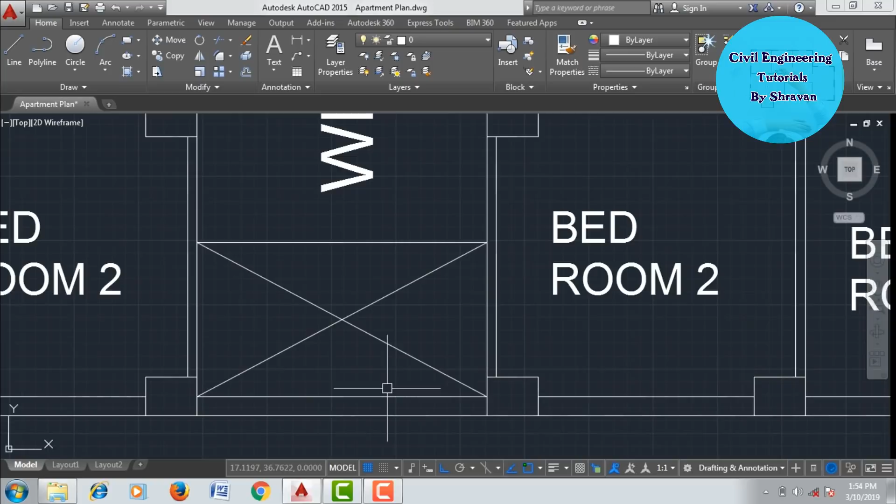This is the first flat. It consists of kitchen, hall, bedroom and bedroom. The right side also consists of hall, bedroom 1, bedroom 2 as well as kitchen. This is my wide veranda. It consists of a lift portion for the apartment building and staircases at the east facing.

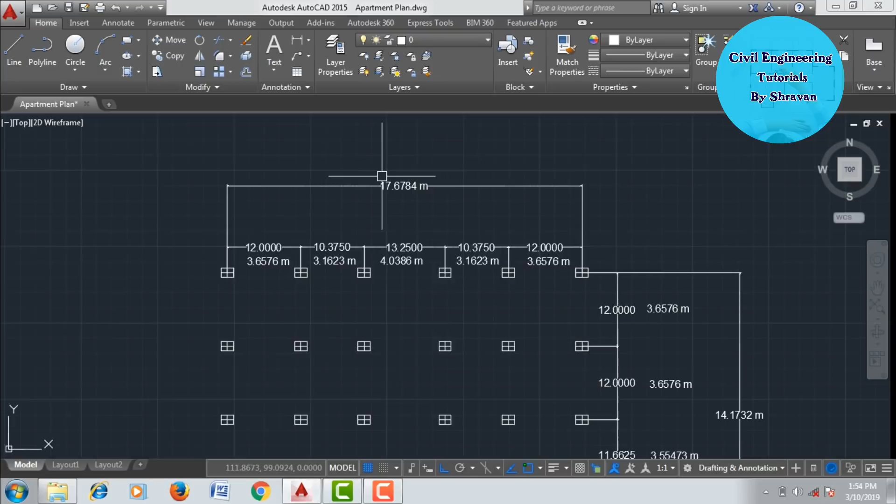This is the center to center distance between the columns. I converted these feet into meters. 12 feet from column 1 to column 2 is nothing but 3.6576 meter. So I converted this. It consists of 17.6784 meter in the length direction and 14.1732 meter in the width direction. So this is my AutoCAD plan for the apartment building.

I will design this apartment building in STAAD Pro V8i software. Go to your STAAD Pro V8i software. Click on new project, select space. Here we need to give the file name. I am assuming the file name is apartment building AP. Save your file location, for example to the desktop. I am saving my file location to apartment building design.

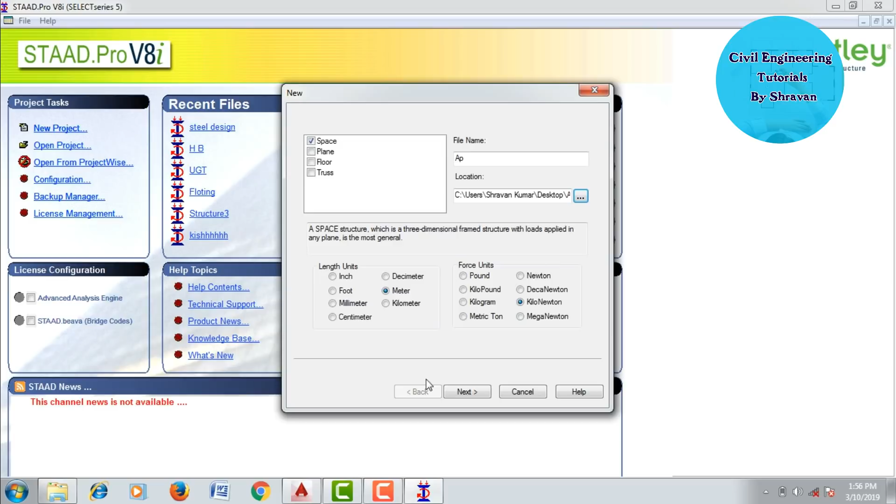Click on OK. Here we need to select the length units as meter and force units as kilonewton. Click on next button. After that, click on add beam command. Click on finish button. After that, the software will open like this. Keep your structure in front of you. Go to geometry directly. Click on run structure wizard.

Here we need to select the model type from truss models to frame models. We need to select frame models, and in this we need to select bay frames. Here we need to enter the length direction distance as per the plan. We need to enter the length of the apartment, 17.6784 meter. And we need to enter the height of the apartment.

Initially I will consider only the bottom story of the apartment. After modeling the bottom story, I will copy it to the remaining 5 stories. For this case, I am considering a 3 meter height for the first story. For the width, we need to consider the width of the building, 14.1732. After that we need to enter the number of bays in the length direction.

We need to assume the number of bays as per the plan. There are 5 bays in the x direction, nothing but the length direction. So we enter 5 bays. The number of bays in the height direction is 1. The number of bays in the width direction is 4. Click on these 3 dots.

Here we need to enter the length values for each individual bay. Length is nothing but the center to center distance between your columns in the length direction. 3.1623 is the second bay length. The third bay length will be 4.0386. The fourth bay length will be 3.1623. The last bay length will be

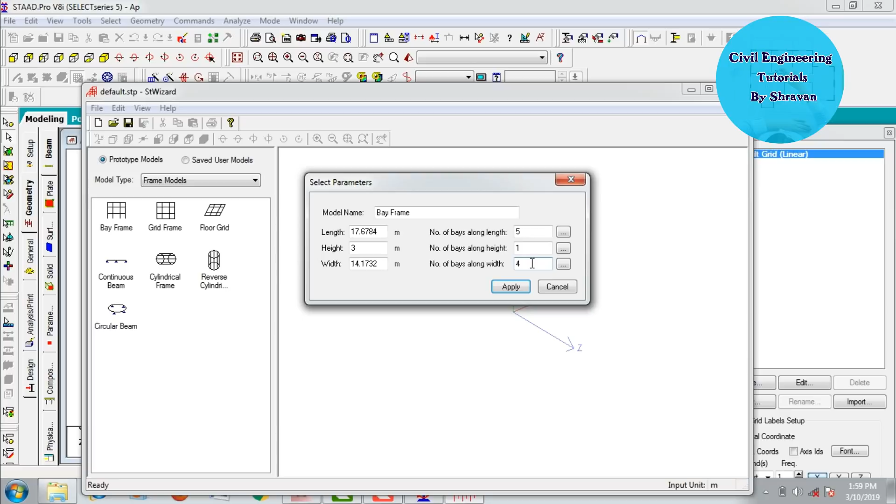3.6576. Click on OK. After that we need to give the number of bays along the height direction with the 3 meter distance. Click on OK. After that we need to give the values for the width direction. Click on the 3 dots here. Here we need to enter the length values. For the first bay length we need to enter the value as 3.30327.

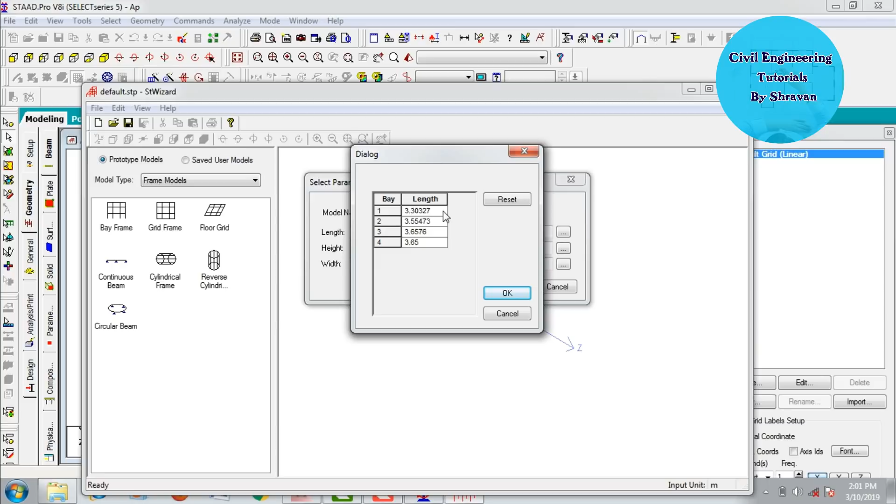For the second bay length we need to enter 3.55473. For the third bay length we need to consider it as 3.6576. For the fourth bay length we need to consider 3.6576. Click on OK, then click on apply. So this is my general center to center distance for the respective bottom story of the apartment building.

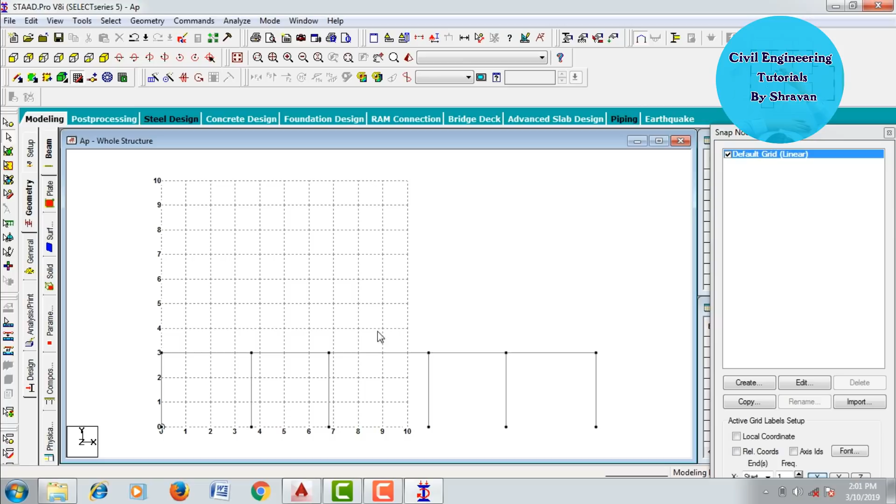Now we need to merge this model from Structure Wizard software to STAAD.Pro V8i software. For that, just cancel this, click on the S button, and click on OK. It will merge this model from Structure Wizard to STAAD.Pro V8i. Keep your structure in 3D view and hide your snap node grid.

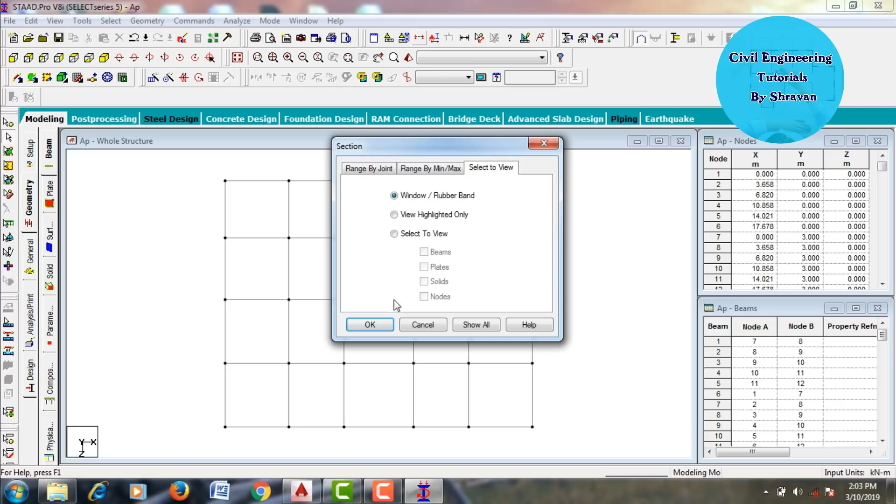After that we need to add the staircases as well as the lift portion for the apartment building. For that, keep the structure in top view. Here we need to select the staircases, and here we need to create the lift portion. Go to cut section command, click on select to view, click on OK. Just cut your staircase portion. After that keep your structure in 3D view again.

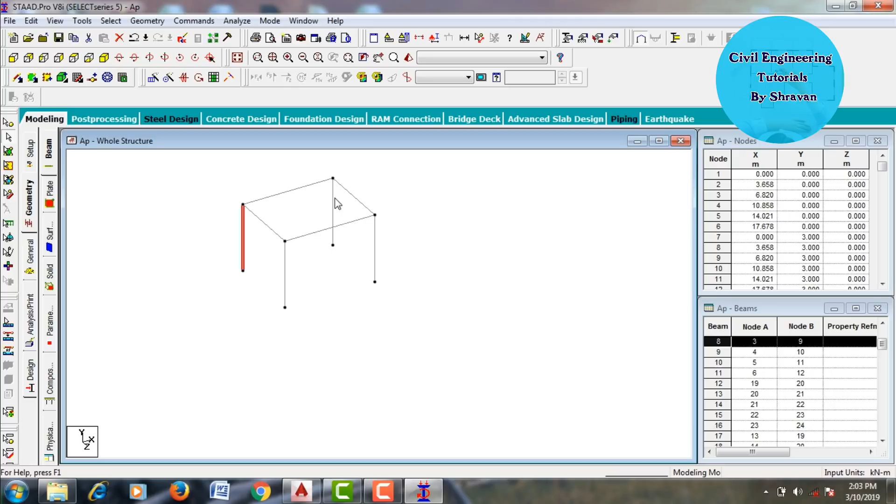For this apartment building, the stairs will go up from here to some distance, then there will be a landing, and from the landing it continues to the remaining portion. So initially we need to create the landing. For that, select your two columns, go to insert node, and insert a node at the midpoint.

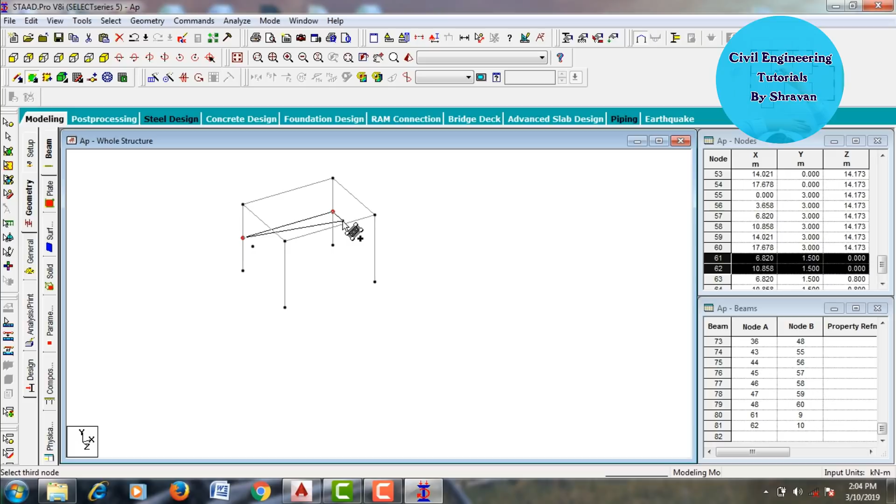After that, select the node points and copy them. Paste the nodes at a distance of 0.8 meter in the Z direction. Click on OK. Then we need to join these node points using a plate. Go to add 4 node plate, select your first node point, second node point, third node point, and fourth node point.

After that we need to add the beam section for the landing. Go to add beam command and add your beam portions for the landing. Then we need to create the center point for this beam. Right click, click on insert, create a node point at the midpoint, and click on OK.

After that we need to measure the center distance from this node point to this node point. Go to measure, select the first node point and the second node point. It is 2.019 meter. Then measure the distance of the second portion. It is also 2.0.

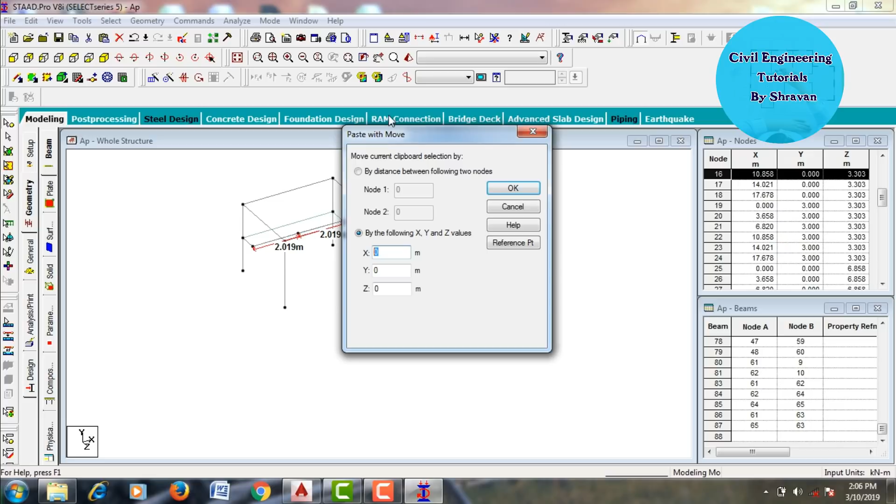Here we need to add a node point at a distance of 2.019 meter. Select the node point, copy, and paste it at an X direction distance of minus 2.019. It will copy your node point to here. Then we need to create a node point for this top portion: right click, go to insert, add midpoint, click on OK.

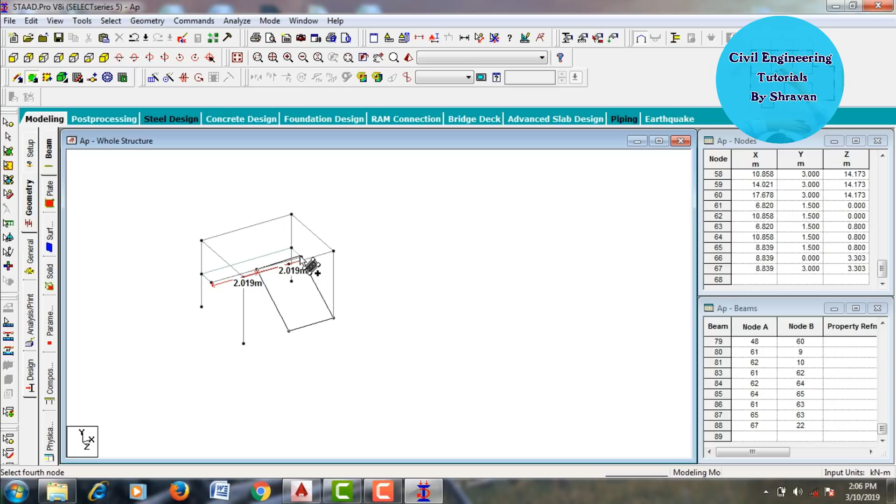After that we need to draw a slab section using a 4 node plate. Select your 4 node plate, then select the first, second, third, and fourth node points. It will draw the staircase slab for the respective sections. Then we add the staircases for the remaining portion: select the first, second, third, and fourth node points. After that click on whole structure command.

I will show you this model in 3D rendering view now. Deselect the remove dimensions command and select 3D rendering. So this is my apartment building with the staircases.

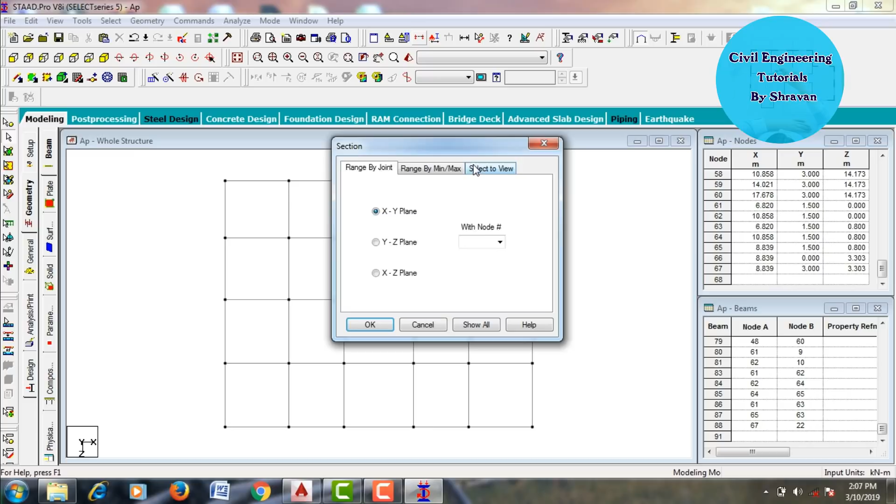After that we need to create the lift portion for the structure. Keep your structure in top view, click on cut section command, click on select to view, click on OK. We need to cut the bottom section for the respective slab.

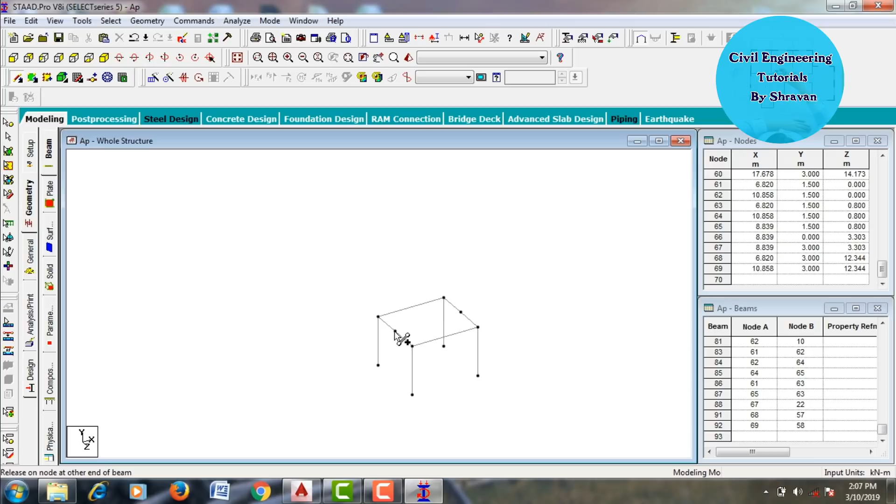So after that we need to add the center point for the respective beams. So go to select your beams, again go to add your node, insert node which is at midpoint, click on OK. So after that we need to connect the node points in this direction. So go to your add beam command. So connect your respective nodes in this direction.

After that we need to create the node points for the respective direction in downward direction. So for that go to select your node points. Just I am selecting my node points. Go to copy. So paste nodes which is at a distance of -3 in downward direction. Click on OK. Add. So go to keep your structure in top view now.

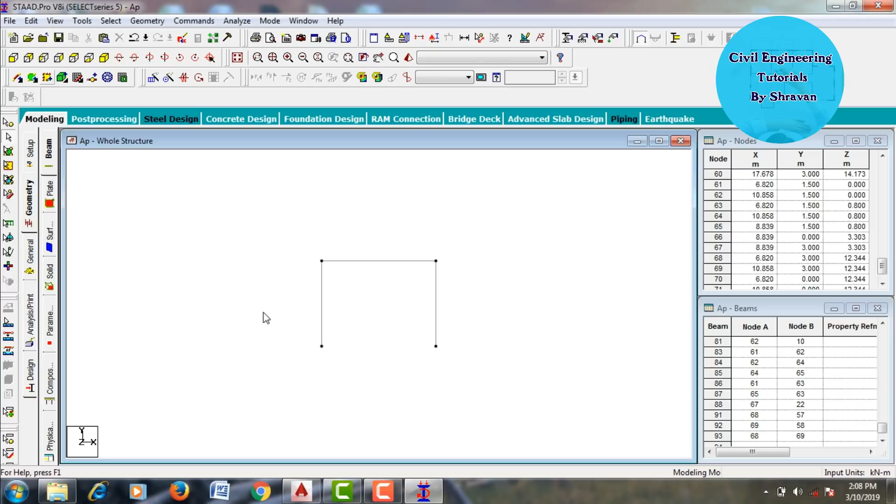So here we need to add the column section for the respective node points. Go to select your node point, select this node point, again select this node point, select this node point, select this node point. So go to geometry, connect beams along Y direction. Click on OK. So it will connect your beams for the respective slab. After that we need to click on whole structure command.

After that we need to add a slab portion for the remaining case. So for that go to select your 4 node plate, click on first node point, second node point, third node point, fourth node point. Again select your first node point for the right hand side also, second node point, third node point, fourth node point for the respective slab.

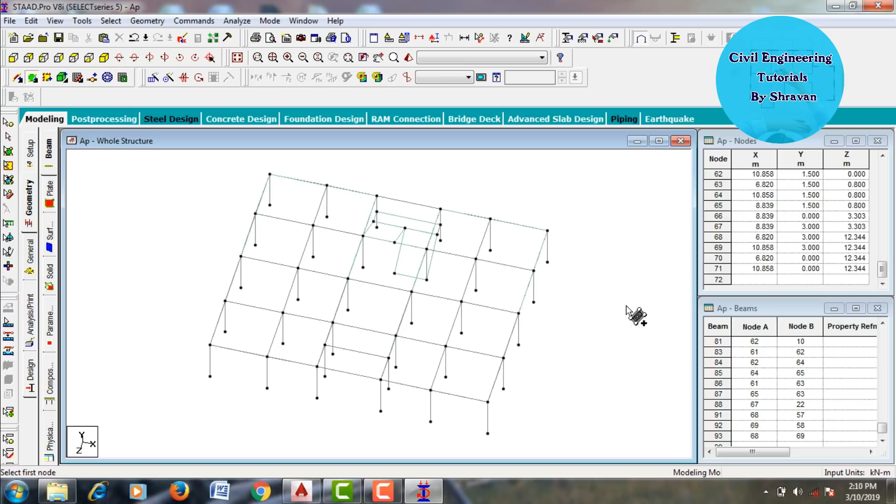So after that we need to add a slab portion for the respective remaining veranda. So for that go to select your top view, select first node point, second node point, third node point, fourth node point for the respective slab. So after that I will show you this model again in 3D rendering view. Go to select 3D rendering view for the respective structure.

So this is my general apartment building. It will be consisting of your staircases as well as lift portions. Here I assumed open space for the respective lift case. So after addition of remaining stories, I will add the shear walls for the respective lift portion. For the lift portions, shear walls are generally considered for the respective section. So after addition of remaining stories, I will add the shear wall for the lift portion in this apartment building.

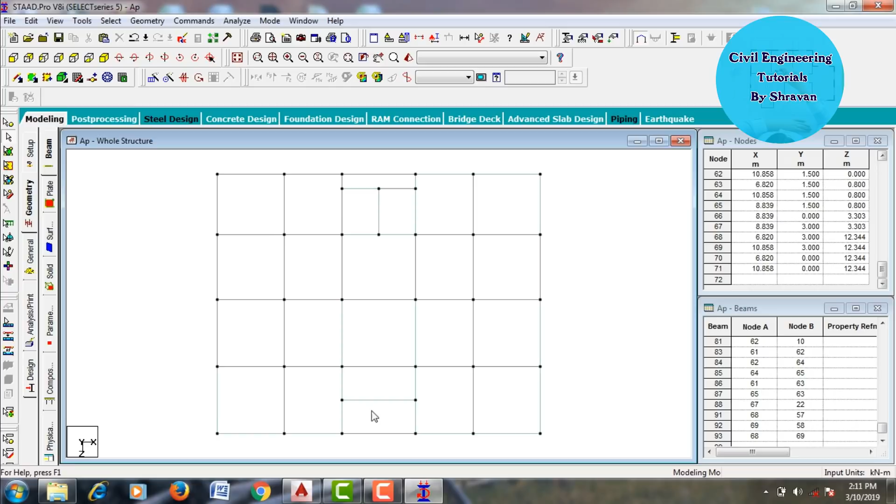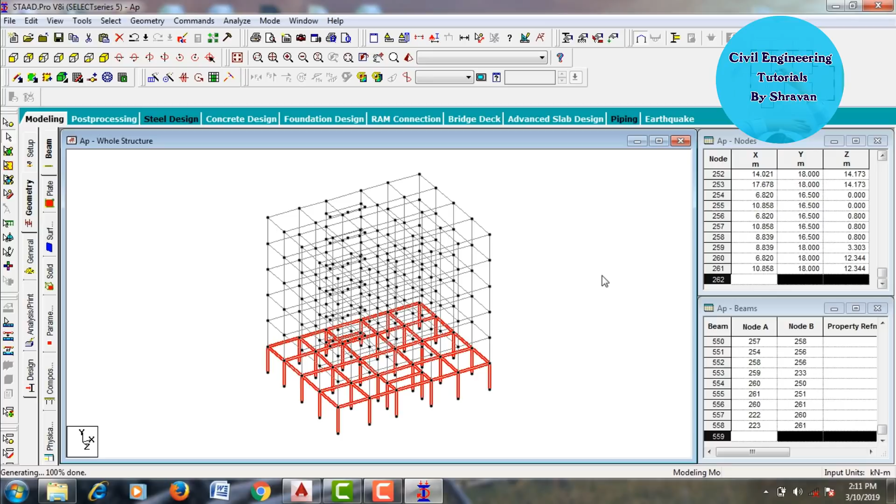So after that, go to your 3D rendering view. Here we need to copy the respective structure to remaining stories. So for that, select all your components for the respective building. Go to translational repeat. Here we need to select Y direction and enter the number of steps. This is my first slab. We need to enter the remaining steps. Each step will be consisting of 3 meter height. Click on OK. So it will copy your respective structure to remaining 5 stories.

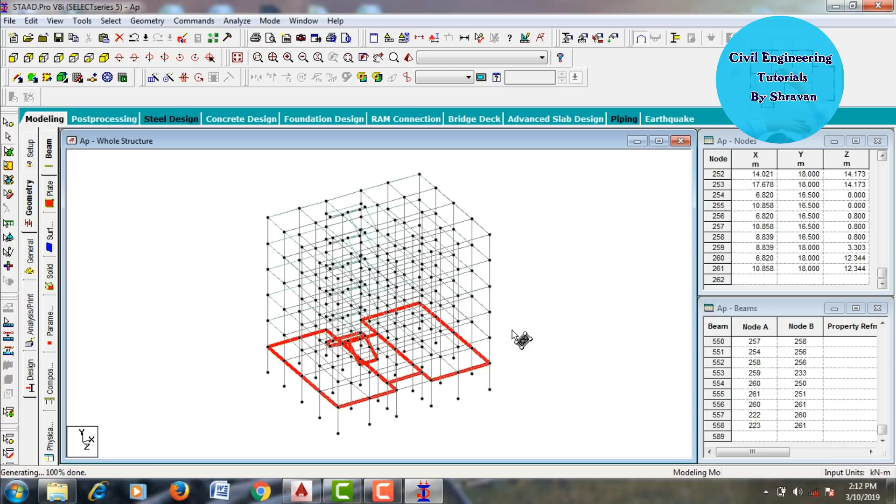So after that we need to copy the respective slab section to the remaining stories. So for that go to select your slab cursor, drag to your whole structure, again go to your translational repeat, again in Y direction. Number of steps are 5. Each step will be consisting of 3 meter height in Y direction. Click on OK. So it will copy your steps, staircases as well as your respective lift portion to remaining section.

So I will show you this model in 3D rendering view. This is my 3D rendering view for the apartment building. It will be consisting of staircases as well as lift portion of G plus 5 story building. So after that I need to add the shear wall for the lift portion. So for that keep your structure in top view. Go to cut section command, click on selective view, click on OK. Cut the lift portion for the respective structure.

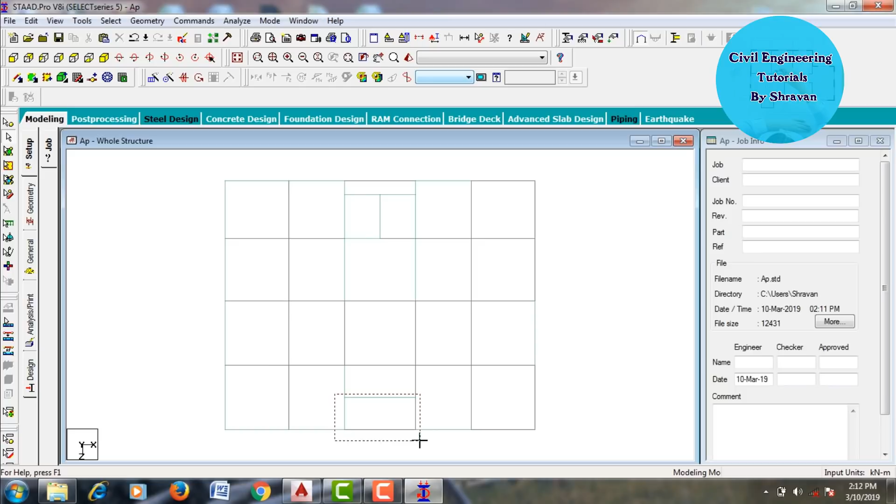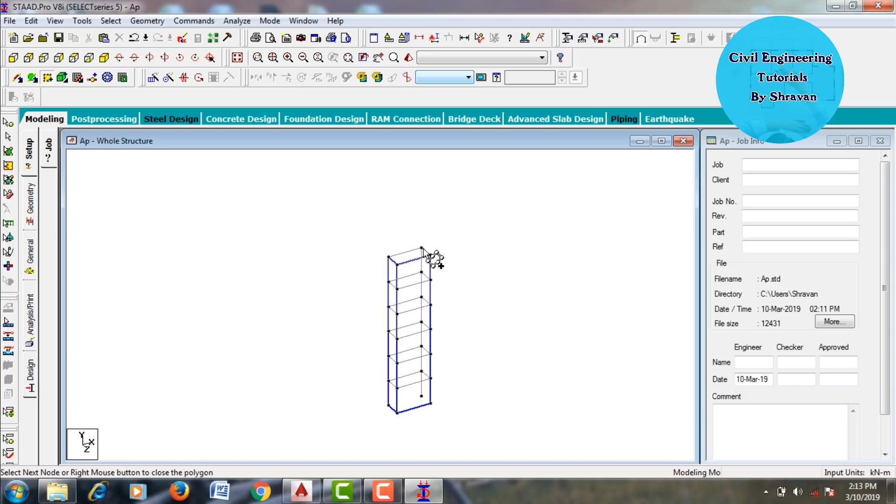So go to select in 3D view. Here we need to add the shear wall. For addition of shear wall we need to select the surface cursor, select your first node point, second node point, third node point, fourth node point, and first node point again. Again select your first node point for the left hand side section, second, third, fourth and first node point. Again first, second, third, fourth, and first node point for the respective case.

After that we need to see the whole structure command for the respective building. Click on whole structure command. So I will show you this model again in 3D rendering view. Click on 3D rendering view for the respective structure.

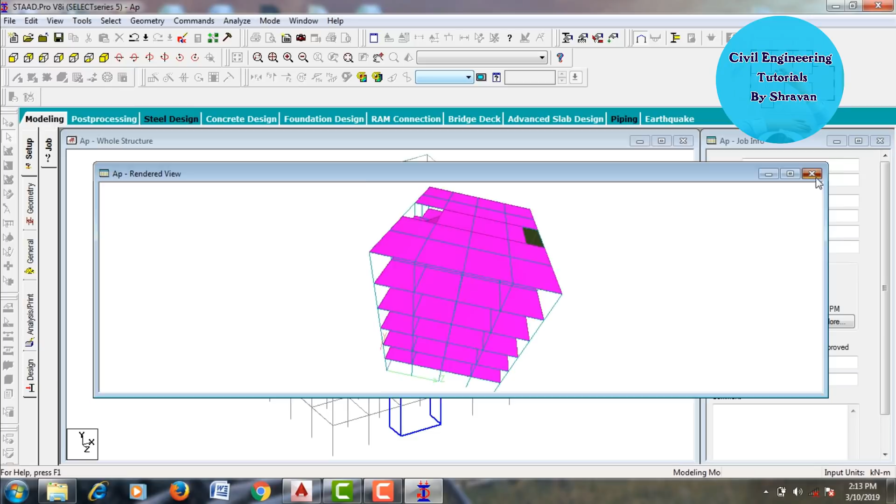This is my 3D rendering view for the respective apartment building. After that we need to proceed for the properties section. Go to general, click on properties. Here we need to define the beam sections as well as column section for the respective case. Here we need to assume the rectangular section.

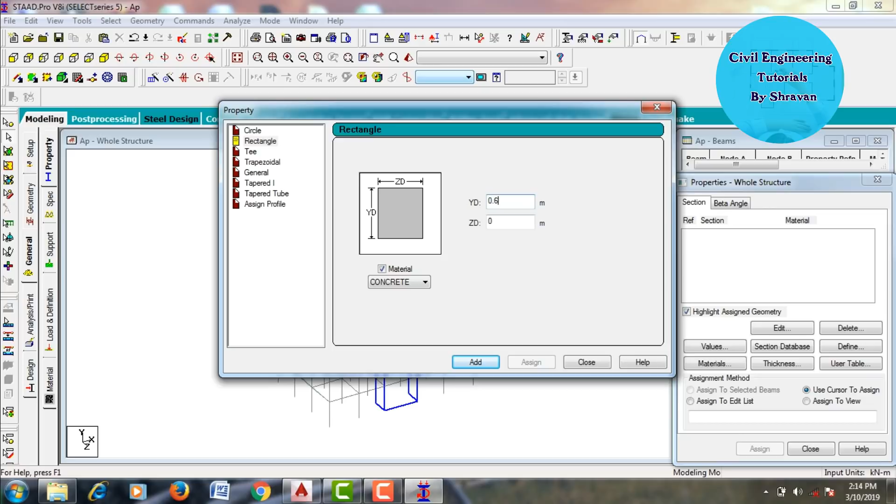Here we need to enter the value of YD as ZD distance. YD is nothing but your 2 feet. I converted that 2 feet into meters, so it is 0.6096. After that ZD distance is 0.4572. Click on add. After that we need to give the dimensions for the respective beam. For the respective beam, I consider 0.4572, nothing but 1.5 feet. Click on add, click on close.

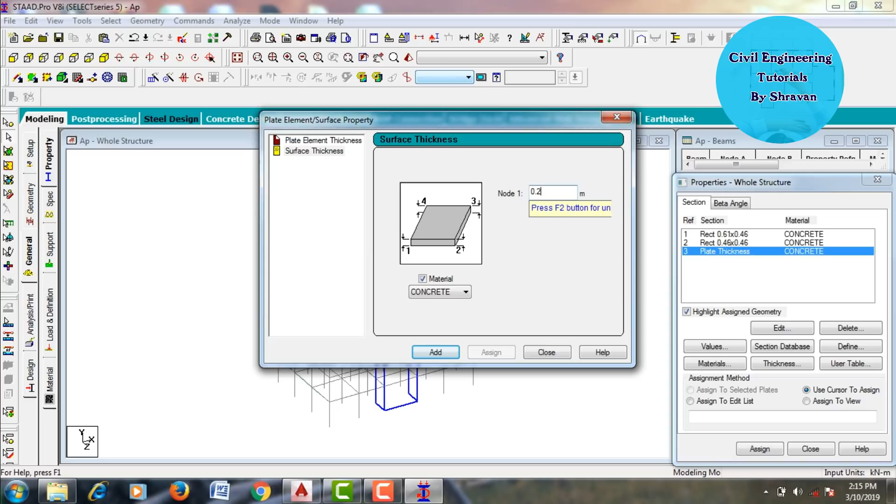After that we need to define the thickness for the respective apartment building slab section. Click on thickness, next we need to assume the thickness for the respective slab. I am assuming the slab thickness will be consisting of 0.15, nothing but 150 mm. Click on add, go to add your surface thickness, nothing but shear wall thickness. I am assuming shear wall will be consisting of 0.23 meter thickness. Click on add, close. After that we need to assign the respective sections for the apartment building.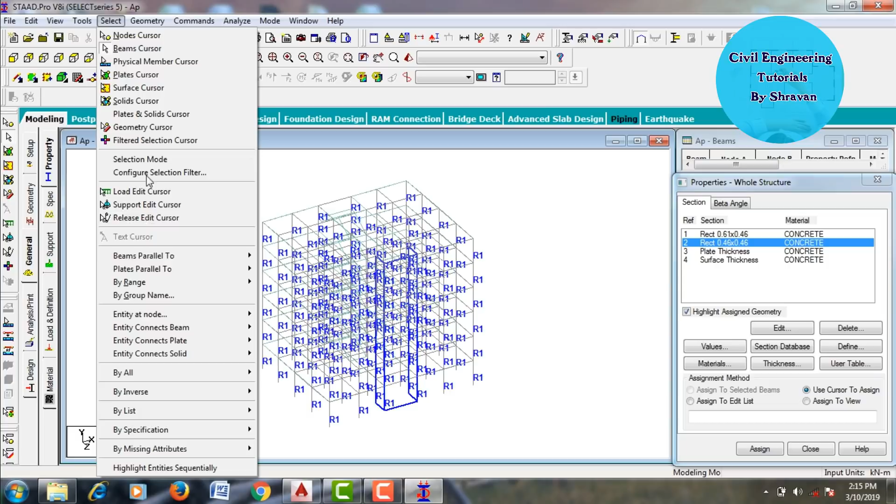Go to select your column section, go to select beams parallel to Y direction, click on assign to selected beams, assign yes. After that go to select your beam sections, go to select beams parallel to X direction, again go to select beams parallel to Z direction, click on assign to selected beams, assign yes.

After that we need to assign the plate thickness, nothing but slab thickness, for the respective portion, click on assign to view, assign yes. After that we need to assign the surface thickness, nothing but shear wall thickness, for the respective building, click on assign to view, assign yes.

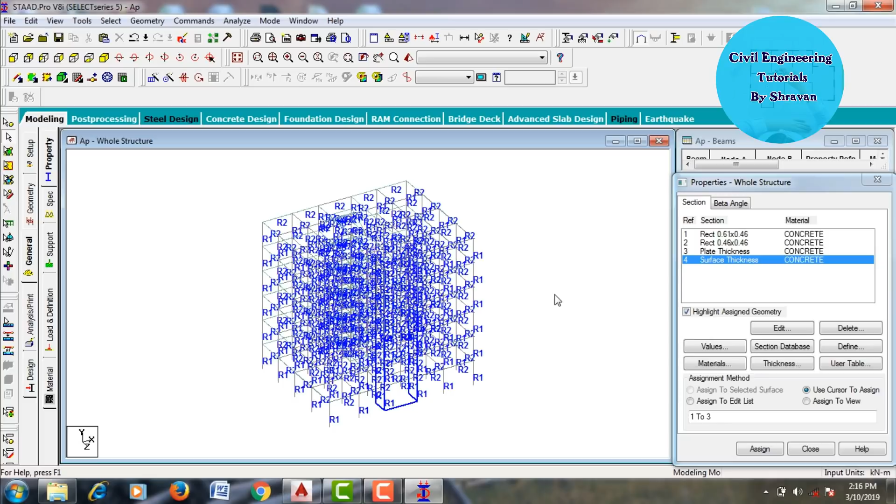I will show you this model again in 3D rendering view for the respective apartment building. Go to click on 3D rendering view for the respective building. This is my 3D rendering view for the respective apartment building.

It will be consisting of 2 feet by 1.5 feet is my column size, and 1.5 feet by 1.5 feet is nothing but your beam size, and 150 is my slab thickness, and 230 is my shear wall thickness.

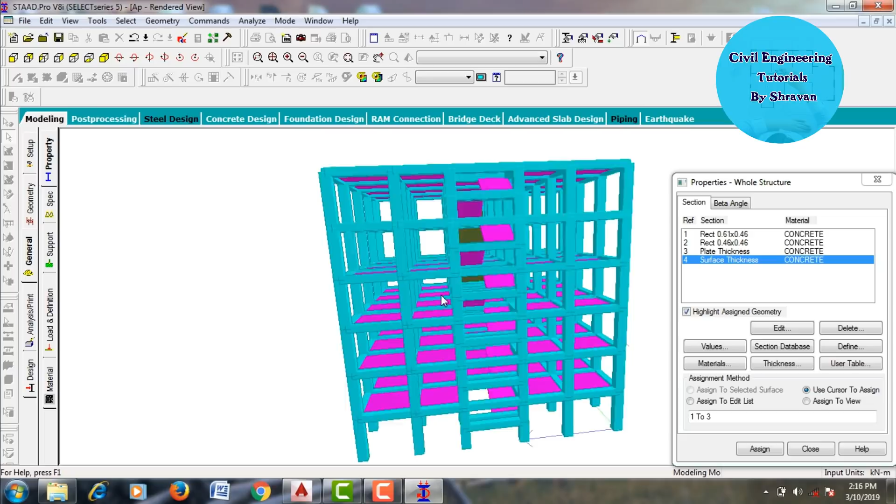After that we need to add the supports for the respective apartment building. Click on supports, keep your structure in front of you, click on create button. Here we need to create the fixed support. Click on add, select your support to drag your bottom section for the respective portion. Click on assign to selected nodes, assign yes.

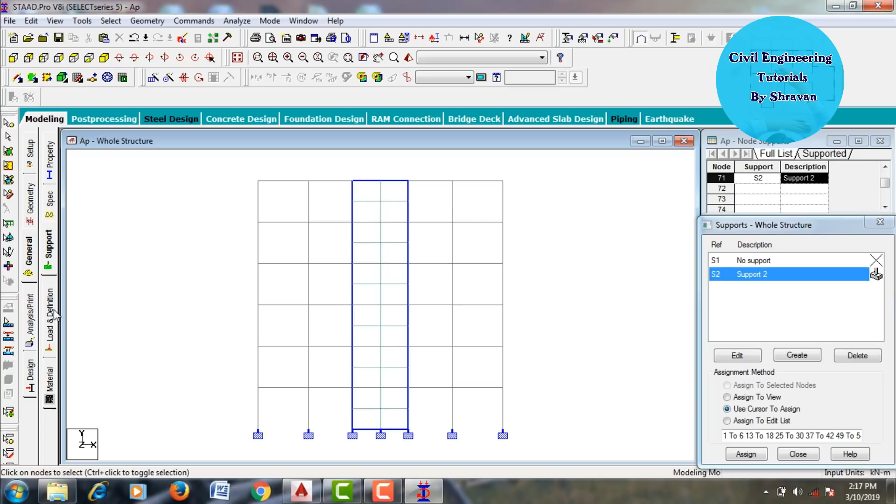After that go to loads and definitions. We need to add the load cases for the respective apartment building. For this building, I am considering dead load, live load as well as floor load. For assigning your load cases, go to load case details, click on add, go to add your dead load. Here you need to enter the value of load case as dead load DL, just I'm considering as DL.

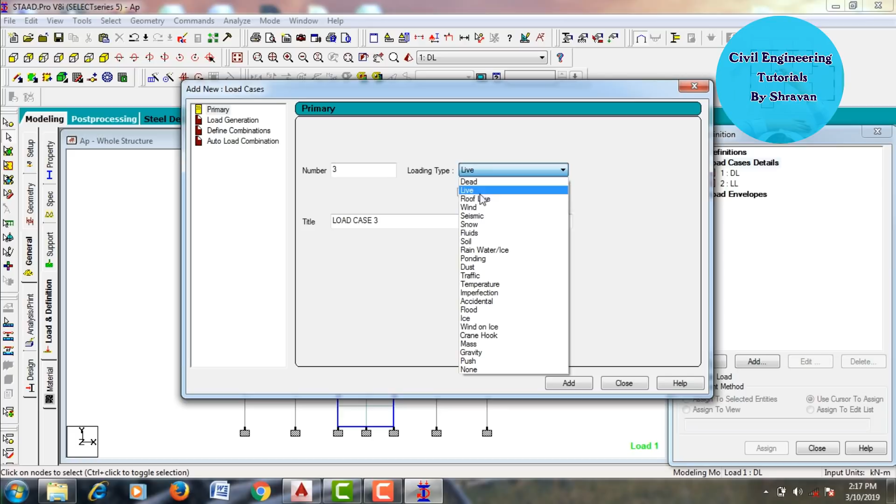Click on add button. After that select your live load, just we need to consider load case as LL. After that we need to consider load type as roof live. Just I'm considering floor load FL. Click on add, so after that close it.

Go to select your dead load, click on add button. Here we need to add the self weight for the respective structure in Y direction with -1 as the self weight factor. Click on add, close.

After that go to select your live load, click on add button. Here we need to enter the value of floor load, so we need to enter the value of pressure. I'm assuming the floor load will be consisting of 4.5 in minus direction in global Y direction. My first slab is at 3 meter as well as my last slab is at 18 meter.

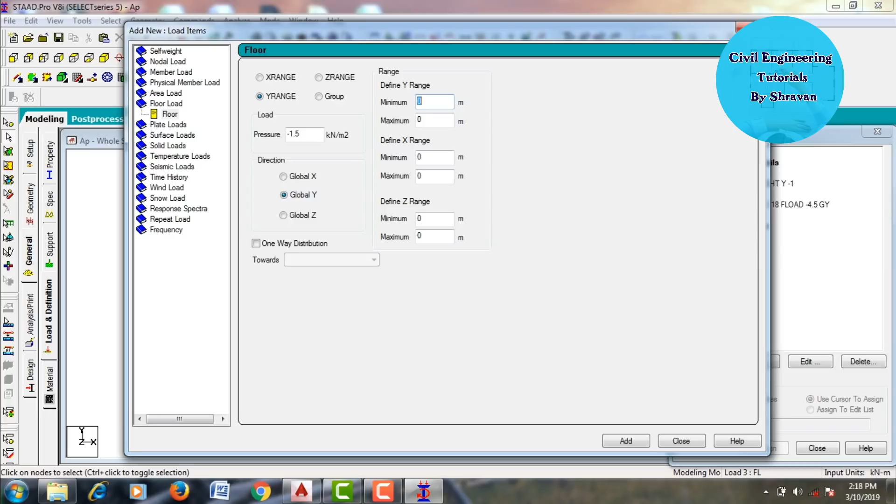Click on add, close. Go to your floor load again, click on add, again select your floor load. Assuming the floor load consists of minus 1.5, acting at a distance of 3 meter as well as 18 meter. Click on add, close. After that, go to select your self weight, click on assign to view, assign yes.

Now I will show you the live load for the respective building. This is my live load, which is acting at minus 4.5 intensity. And the floor load consists of minus 1.5, in the GY direction.

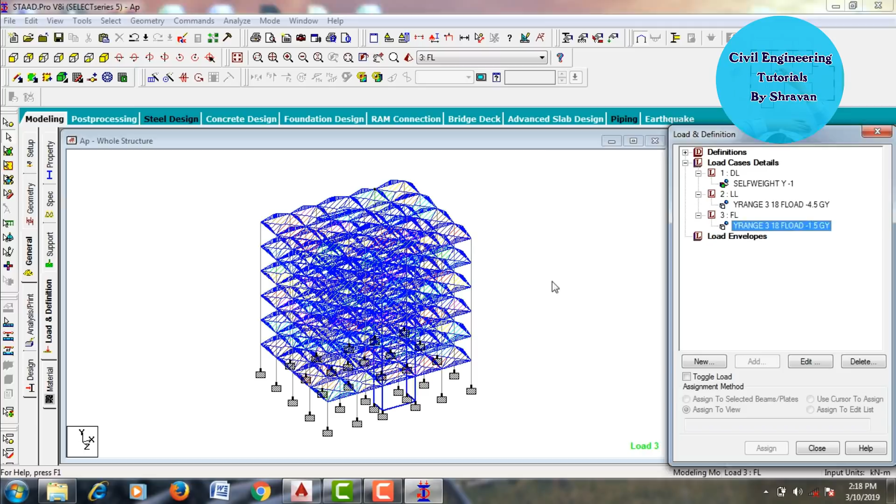After that, go to select your material cases, go to select your concrete for the respective structure, click on assign to view, assign yes.

After that we need to proceed for the analysis part. Go to analyze and print, click on add button, click on close button, again go to analyze, run analysis, save it. Here we need to check for zero errors for the respective model.

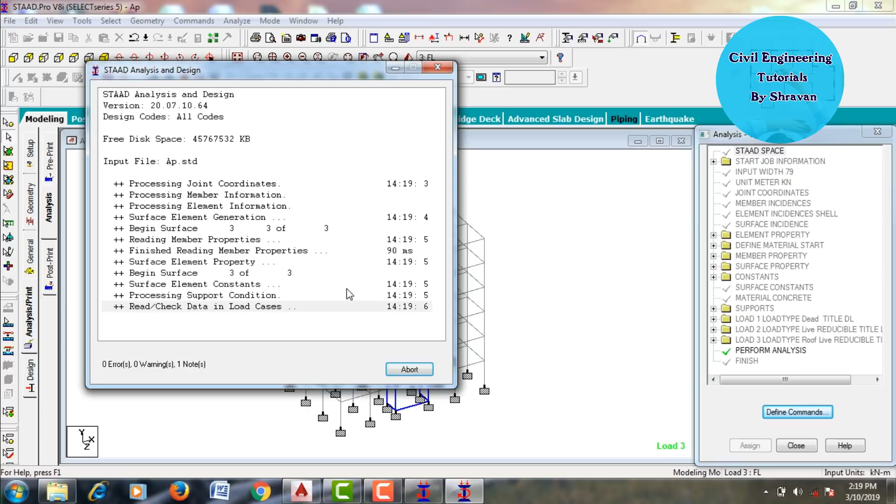For the respective apartment building of G plus 5 stories, my model is checking. If I'm done with zero errors for the model, my analysis part is correct, then we need to proceed for the design part. Here my model is observed with 0 errors, 0 warnings, 1 note for the respective structure. Click on done button.

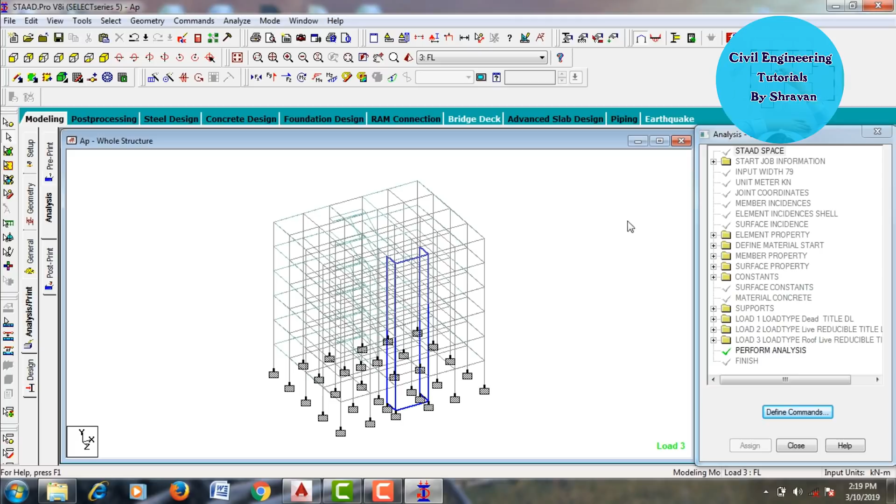After that we need to see the results for the respective structure. Go to click on post processing mode, apply all load cases for the structure, click on apply, click on OK. This is the deflection diagram for the respective apartment building.

After that go to select your MZ. This is the bending moment diagram for the respective apartment building.

After that go to select your FY. This is the shear force diagram for the respective apartment building.

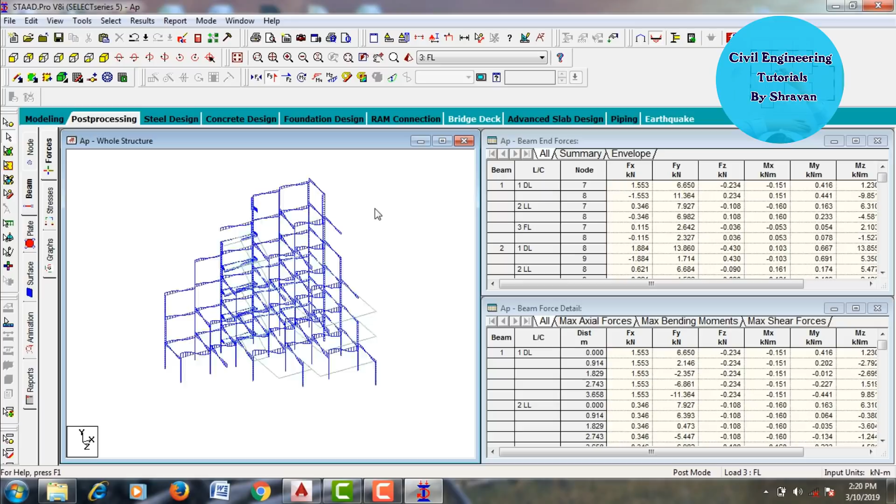I will show you the stress diagram. Go to select your stress. This is the stress diagram for the respective apartment building.

After that go to select your forces. Go to apply your stress type as maximum absolute pressure. Click on apply, click on OK. This is the maximum plate load for the respective apartment building.

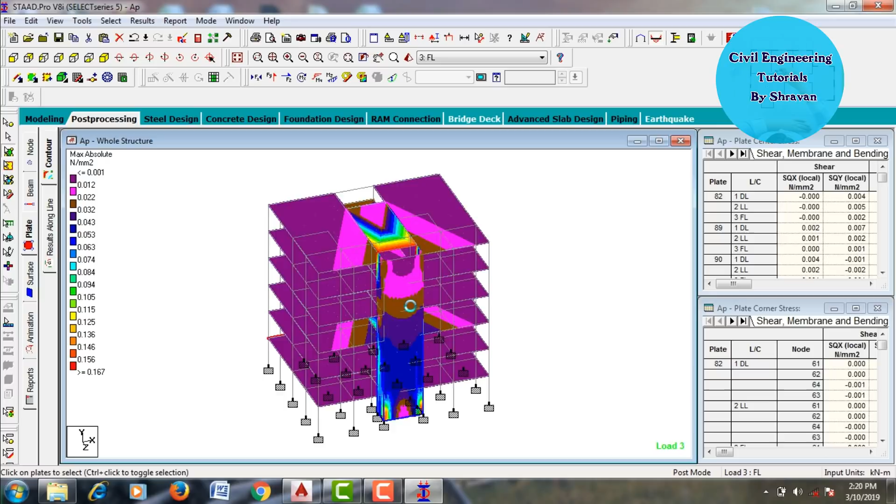After that go to select your surface load. Here also we need to apply the stress type as maximum absolute pressure. Click on apply, click OK. This is the stress diagram for the respective case.

Go to your animation, click on your deflection, click on apply, click on OK. This is the deflection diagram for the respective apartment building of G plus 5 story building.

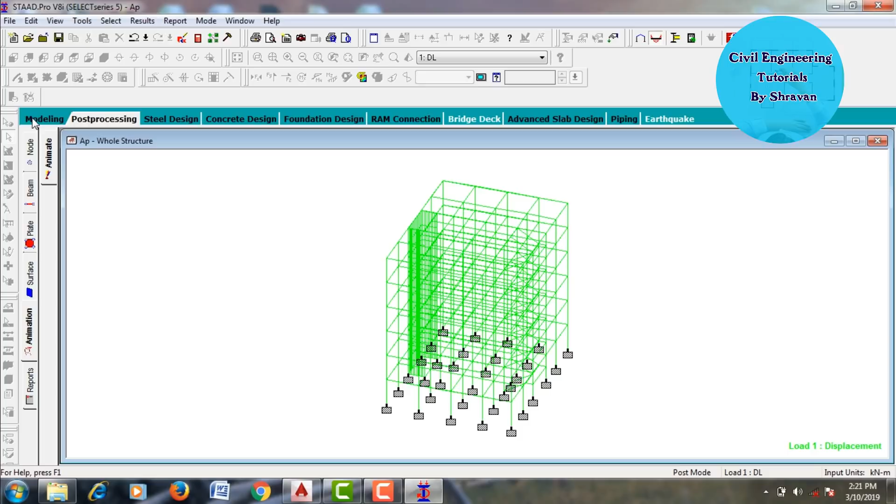After that we need to proceed for the design part for the respective apartment building. For that go to your modeling, again we need to select design. Click on design. Here we need to select the type as concrete section.

Concrete section. Here we need to go to select your concrete. Go to select current code as Indian standard system. For the respective apartment building, I am considering M40 grade as well as FE 600 grade steel.

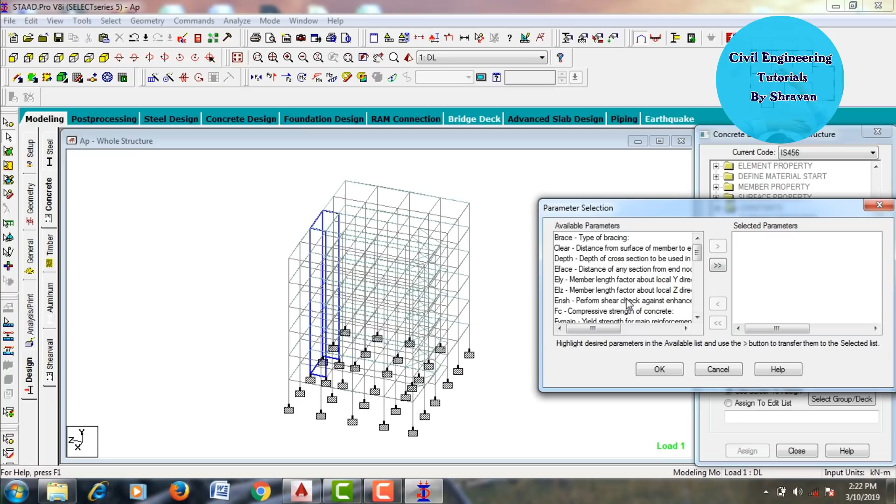Go to select parameters. Initially we need to deselect all the selected parameters for the respective apartment building. After that we need to pick the values of FC as well as FY main, FY section reinforcement. Click on OK. After that click on define parameters.

Here we need to enter the value of compressive strength for the respective building. 40,000 is my compressive strength for the respective apartment building. Click on add. Again we need to select the yield strength for the respective building.

600,000 is my respective FY main yield strength. After that we need to enter the yield strength of shear reinforcement, also 600,000.

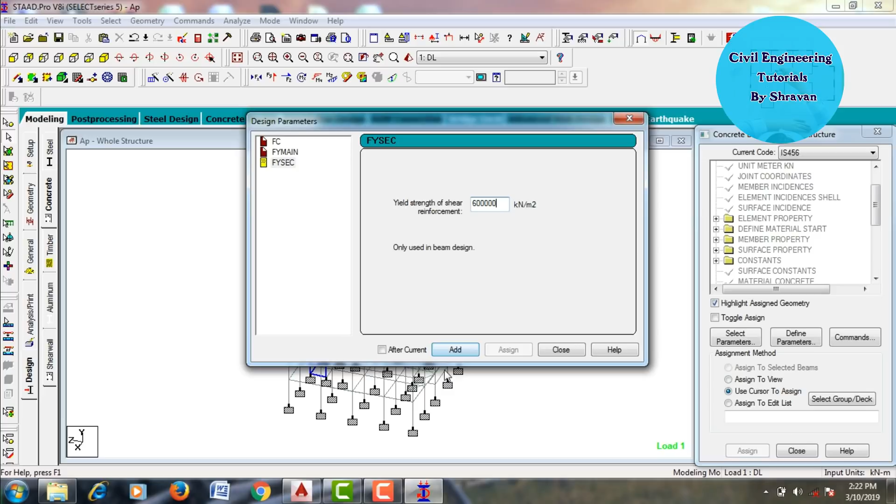Click on add, close. After that go to commands. Here we need to define the beam command, again we need to define the column command, again we need to define a slab element command, and again we need to define the takeoff for the respective apartment building.

Close it. After that we need to assign the parameters for the respective building. For that select your parameter FC, go to click on assign to view, assign yes. After that go to select your FY main reinforcement section, click on assign to view, assign yes. Go to select your FY section reinforcement, assign to view, assign yes.

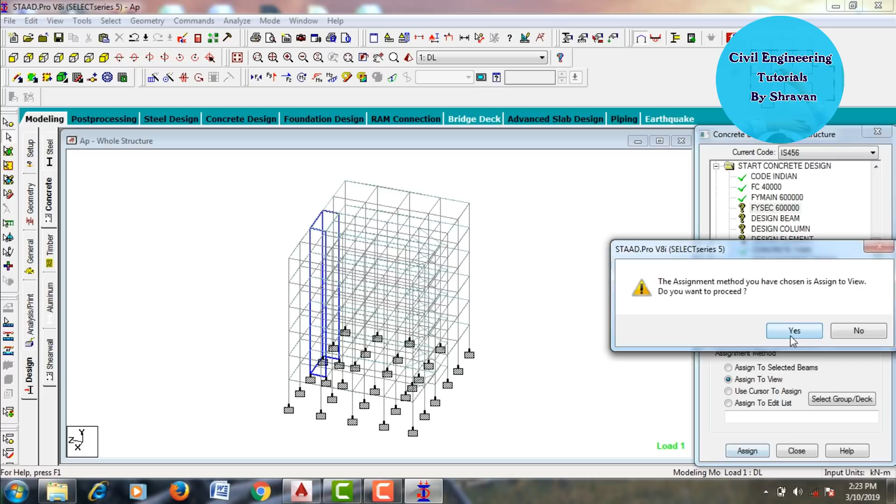After that, go to select design beam command, select beams parallel to X direction, then select beams parallel to Z direction, click on assign to selected beams, assign, yes. Then select the design column command, select beams parallel to Y direction, assign to selected beams, assign, yes. Then select your design element, click on assign to view, assign, yes.

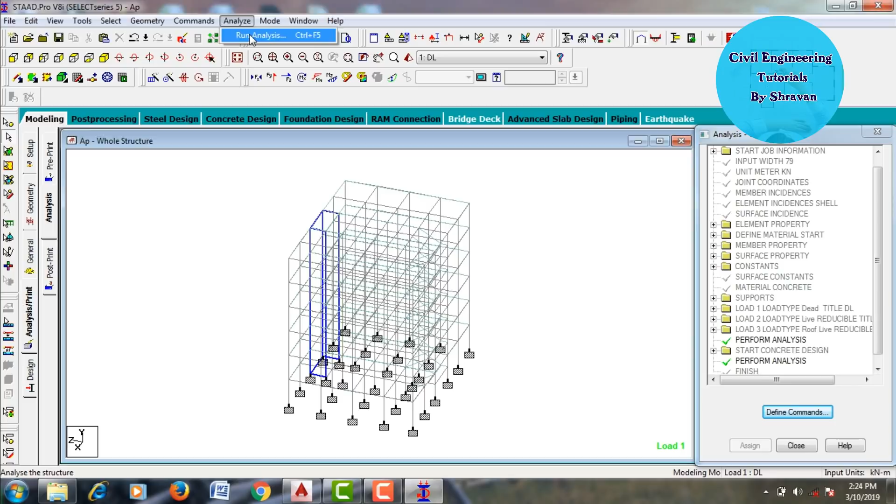After that we need to proceed for the analysis part again, and check for zero errors for the respective design case. Go to add your analysis and print, click on add, close, go to analyze, click on run analysis, save it. Again check for zero errors. Here my model is observed with 0 errors, 14 warnings, 1 note.

Go to post processing mode again, click on done. Select the beam cursor and deselect the bending moment for the respective building. Select any one beam, just selecting this beam, double click on it, go to concrete design. This is the concrete design for the respective beam, consisting of 13 number of bars of 10 mm dia in tension zone as well as compression zone. Cancel this.

Again select any one column for the respective building. Just selecting this column, double click on it, go to concrete design. This is the concrete design for the respective case, consisting of 8 number of bars, each bar of 12 mm thickness.

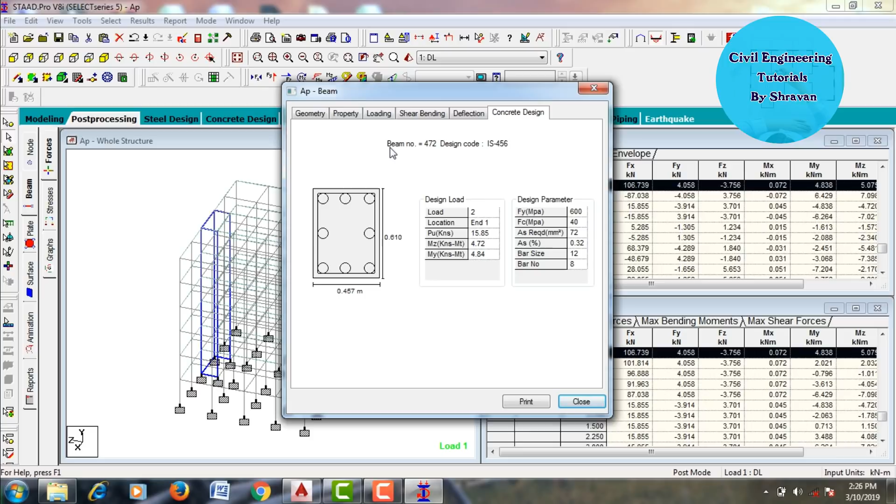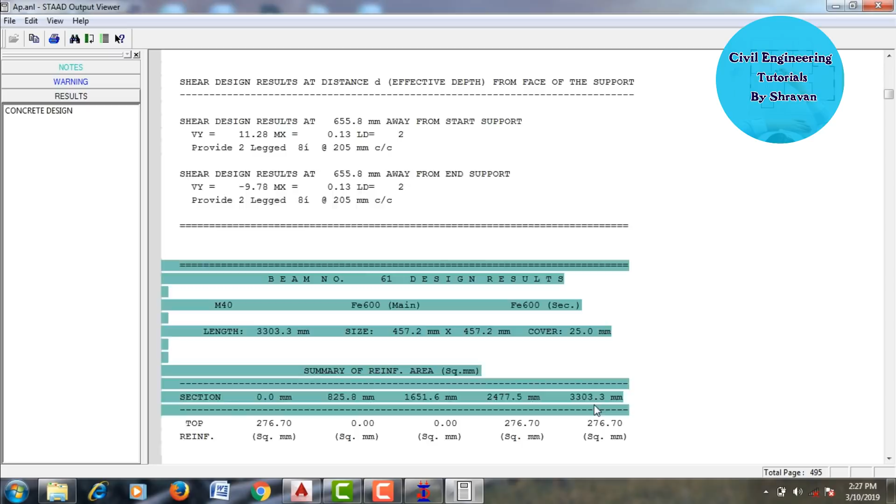After that close it and go to the STAAD output file. This is the STAAD output file, consisting of beam design results, column design results, as well as slab element design results for the respective case, with a total number of pages of 495. It contains each individual frame design, beam design and column design for each frame for the respective case. After that we need to proceed for the foundation design for the respective apartment building.

For that go to click on foundation design. Here we need to include all load cases for the respective structure, click on run STAAD foundation, and it will directly go to STAAD foundation for the respective apartment building. This is my column positions for the respective case, and we need to proceed for the design.

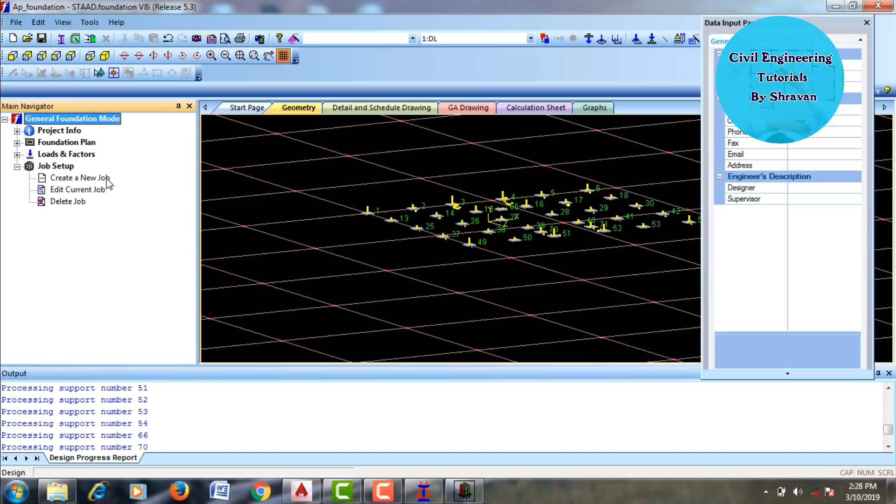Here we need to click on job setup, create job, and enter the job name. I'm assuming apartment building AP. The job type is isolated footing, and the design code is Indian standard system. Instead of the English system we need to select the SI system. Assign include all load cases, click on create job, and it will create the isolated footing design results.

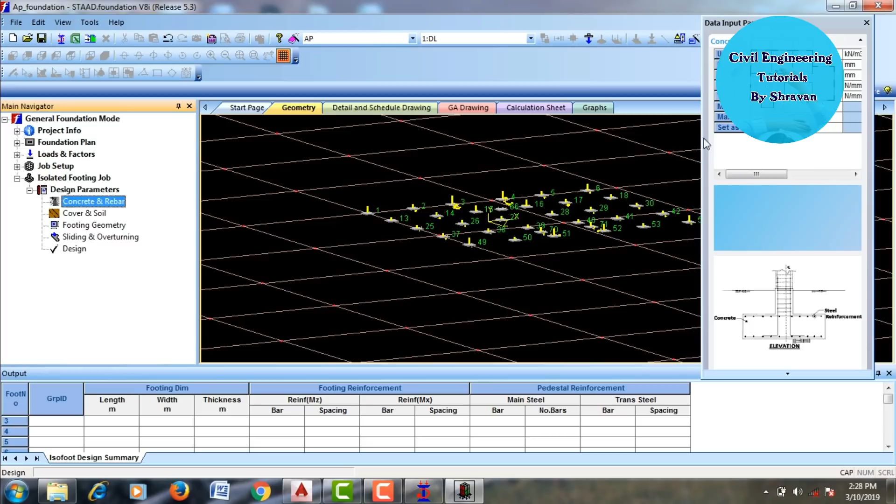I will show you these results. This is my concrete and rebar section, consisting of concrete and rebar. After that go to cover and soil - this is the cover and soil for the respective case. Go to footing design geometry - this is the footing geometry results for the respective case. Go to sliding and overturning moment values.

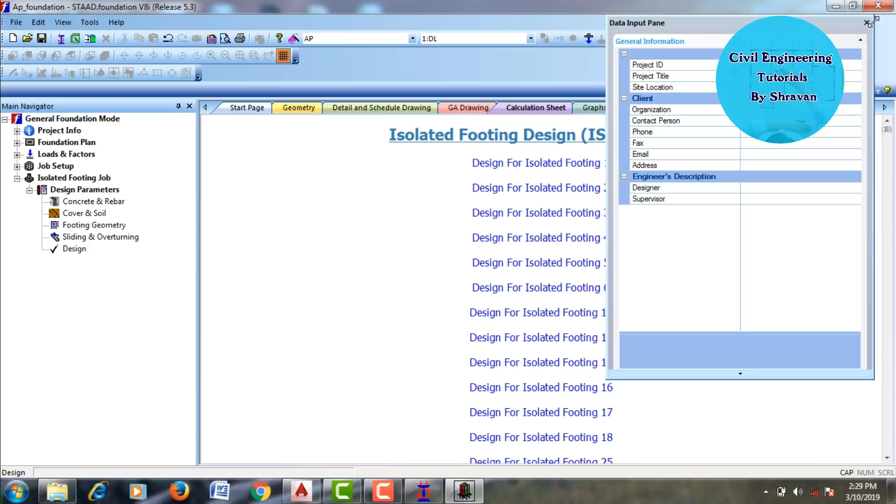After that go to design, click on yes button, and it will show foundation design results here. As per IS 456 2000, it will consist of footings 1 2 3 4 5. Just considering the simple case isolated footing 14, it will consist of isolated footing 14 design details with each individual calculation for the respective case.

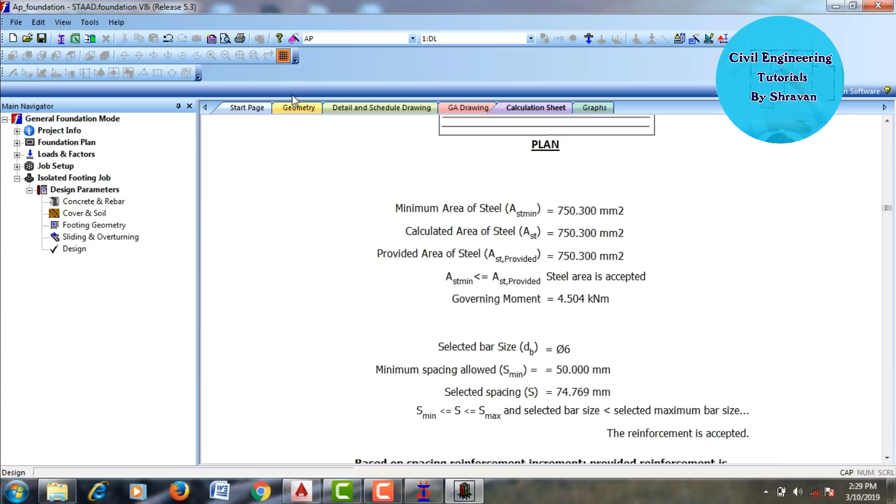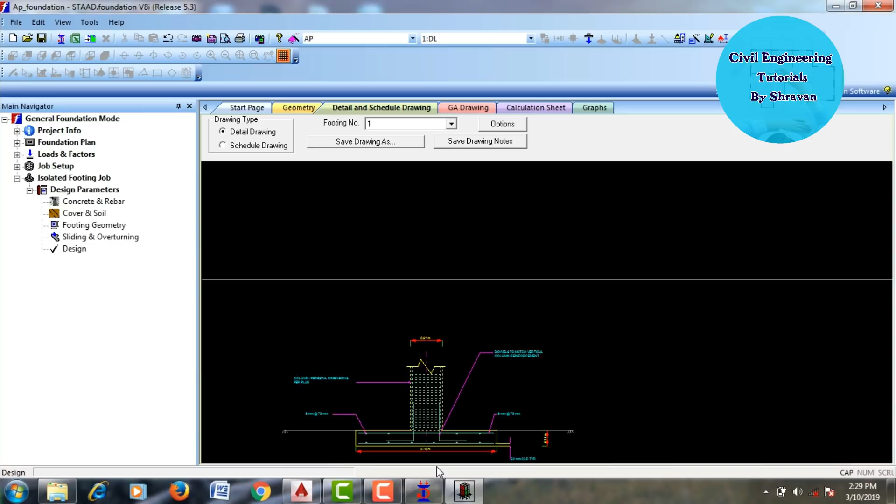After that go to select your geometry, then go to detail and schedule drawing. This is the detail and schedule drawing for the respective foundation design, consisting of reinforcement details in the foundation. It will consist of 6 number of bars at 75 center to center distance, and 6 number of bars at 75 center to center distance for the respective case.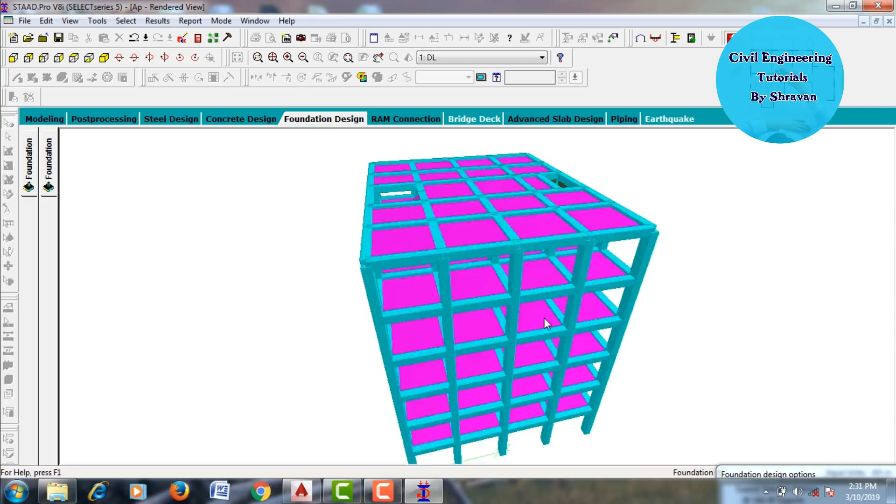After that go to your GA drawing. The GA drawing is the printout you need to take for calculation of center to center distance, as well as column position and foundation design details for the respective case. This is the process of analysis and designing of an apartment building using STAAD Pro V8i software. Thank you for watching, thank you.